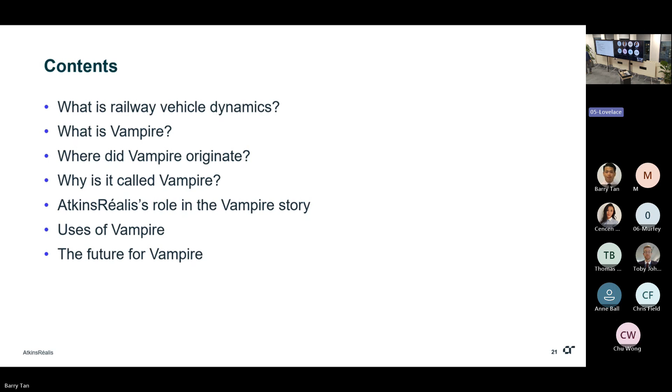So we'll start by asking, what is railway vehicle dynamics? What is Vampire? Where did Vampire originate? Why is it called Vampire? Right, our role in the Vampire story, AtkinsRéalis, what you can use Vampire for, and what's happening in the future. There are a few use case slides at the end. We'll see if everybody's still awake and if you want to pursue those when we get there. We can get the main bit done.

So, what is railway vehicle dynamics? So, dynamics in general is the study of masses in motion. Kinematics is the study of motion, but not including the mass - it's just where are things. When you start to include the mass and the inertias and the accelerations of particles or masses moving, that takes you into the realm of dynamics.

Vehicle dynamics is a particular subset that looks at vehicles - all kinds of vehicles, whether road, rail, space, any kind of vehicles. Railway vehicle dynamics focuses that down specifically onto railway vehicles. Many aspects are shared across all kinds of vehicle dynamics, but there are some special things about railway vehicle dynamics, the main one being the steel wheel to steel rail interface. Also, the fact that our vehicles don't pitch or yaw very quickly - they don't turn upside down. They generally have quite an ordered passage through the world, which makes some of the maths a little bit easier. But the wheel to rail interface is central to it.

So what we do covers modal, frequency and damping. If you remember things like this - a single degree of freedom system, we've got a mass at the top, a spring, a damper, and some input, which is hopefully the track's not quite that bad, but it's giving it some input, and that is being transmitted to the mass through the spring, and the damper is trying to control things and dissipate the energy. That's a very simple view of what we do in dynamics. That system will have a frequency, 1 over 2 pi root k over m, yes?

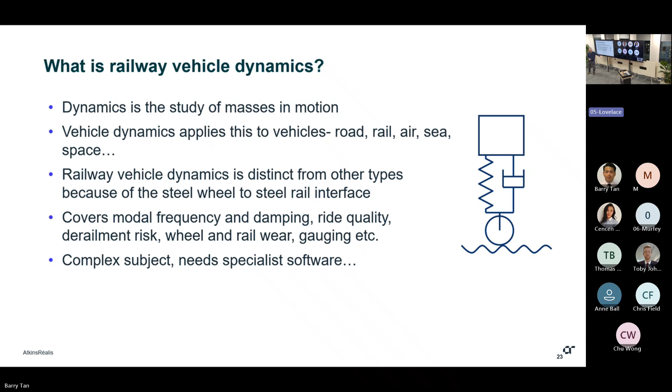As you can appreciate, it's complicated. A railway vehicle is a lot more complicated than that. So we need a computer and some software. And here it is.

So Vampire is what we call a multi-body simulation package. It models an engineering system as an assembly of masses connected by suspension elements. In the simplest analysis, they are linear springs and linear dampers. But we can have bump stops, friction, air springs, shear springs, all kinds of different things that you will find on a railway vehicle. We can model them, stick them in the model.

It's based on equations of motion. So the linear analysis with just springs and dampers that have a quoted rate, we can do old-fashioned eigenvalue analysis. We can basically solve lots of equations and characterize those vehicles in terms of frequency and damping.

But most vehicles are not like that. They include non-linearities like bump stops that do nothing and then they collide, or friction that does nothing and then it slides. That's what we call a non-linearity, and you can't really model that with an equation. You have to use a time-stepping algorithm.

So we do a simulation typically every millisecond or maybe less than a millisecond, and we see what's happened in the previous millisecond, then we see the forces that are applied to the masses. Then we know how the masses accelerate, so then we integrate twice to find where they've moved to, which then tells you how much all the things connected to them have moved, from which you can then calculate the forces, which then cause the accelerations, and you go round and round the loop very, very fast. So the equations are actually fairly simple, but they're applied very, very quickly.

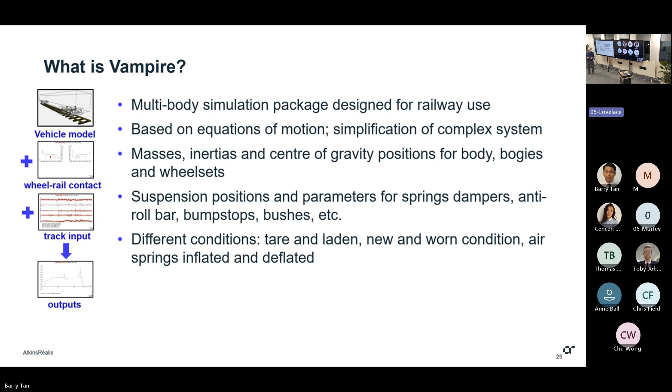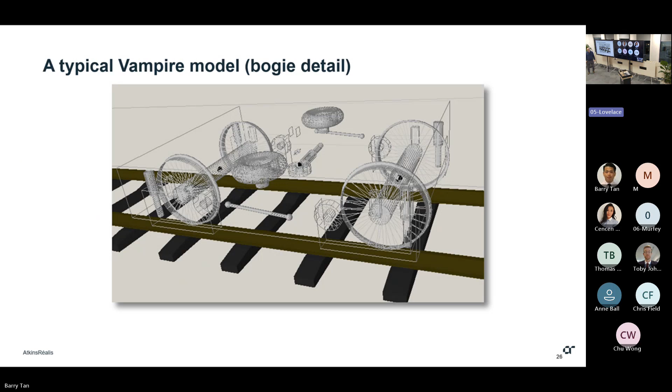This is a typical visualization of a bogie from a Vampire vehicle model. So we've got our wheel sets, we've got some air springs here, yaw dampers at the side to control the stability of the bogie. The axle boxes are held on by these radial arm bushes, and then we've got a lateral damper, some sort of traction arrangement in the middle, an anti-roll bar, primary dampers at the corners. They're the sorts of things that we include in the model.

So the sort of things that go into the model, if we've got the model, is measured track irregularity. So we want to know how the vehicle will respond to track inputs. We can get track data from things like the new measurement train, and we can use huge lengths of it if they're available. So sort of London to Newcastle or Edinburgh is fine. We can just make our way along that.

And that includes things like the curves, the cant in the curves, but it also includes all the irregularities, so the little lateral and vertical wobbles, changes in gauge as you run along the track. And we can also have a user-defined track input. So if we want to design a curve, just say, I want a 200-metre curve with 150 mil of cant, 45-metre transitions, for example, you can just make one as a text file.

Wheel and rail profiles - we can have design profiles like a P8 or a P12, or we can measure worn profiles using something like Mini-Prof or Calipri. We take those into Vampire, and the same things with rails. Then we combine the wheels and the rails together to generate what we call contact data.

We start with the wheels at one side and step them slowly across the rails to the other side, and we calculate the rolling radius, the positions of the contact patches, the size and ellipticity of the contact patches, to make a big lookup table. This is one of the things that makes Vampire run very, very fast, because once that table is available, you don't have to keep recalculating it - you can just keep going back to it.

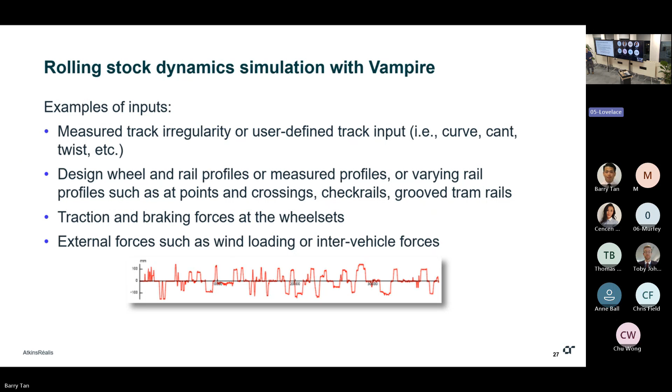So there's lots of things you can put into the mix that you get out - pretty much anything you want. Things we often get out are body accelerations, for ride quality. We can process them according to EN 12299 and predict ride quality index.

Displacement - so if we're doing gauging, we can look at how much the body moves and how near it's going to get to line side structures or trains passing on adjacent lines.

We can get suspension component forces and displacement. So if we want to know if we're overloading a damper or a bush, or we want to know what forces that element is putting into the vehicle structure, we can work that out.

Bogie accelerations and forces, wheel rail forces. So again, things like track shifting forces that are in the railway group standard 2141, we can predict those.

And safety against derailment - things like flange climbing, Y upon Q. This is an example of Y upon Q output. This is where the nasty dip in the high rail is, and that's where there's a high risk of the leading outer wheel actually climbing the side of the rail and over the top of the rail into derailment and rollover.

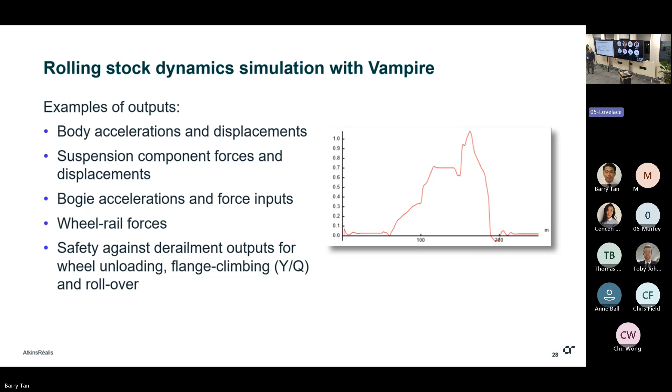But there's anything - wear numbers for wheels or rails. And if the output you want is not available, then you can invent it yourself, as I'll explain later.

So why would you use Vampire rather than just testing stuff? Certainly the freight industry was asking this question, particularly around things like cyclic top, which is actually extremely hard to test.

But you can systematically optimize things. You can try lots of different damper rates, different spring rates. You can see the effect of changing a mass or whatever it might be, and you can do it quite quickly. So you can cycle through things and get a big lookup table of results very quickly. You can test new and modified designs without the expense of having to build them and find that they weren't very good, which is always a win.

Very useful for demonstrating compliance with standards. And, from the RSSB, we need to mention this - suitably validated models that have been compared in simple tests with the behavior of a real vehicle can then be used to do simulations such as a Y upon Q simulation or a cyclic top, which can lead to acceptance of the vehicle through simulation rather than test.

Simulation is cheaper, more flexible and easier to control than track testing. Anybody who's tried to book a path, get a crew, you name it, for a track test - you don't have to do that. What you can do is decide a big range of possibilities, which 3 or 4 you might want to do on a track test. So you can use it as a first sift and then maybe optimize what you do on an actual track test. It allows inputs which are impractical or unsafe in real life.

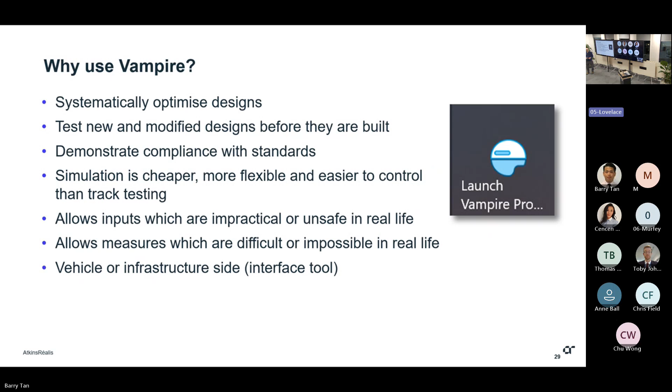We can get measures which are difficult or impossible in real life. So as you're rolling along the track, you can find out the size of the contact patches between the wheels and the rails and where they are, which would be exceedingly difficult to do in real life. We can use it from the infrastructure or the vehicle side, so we can look at loads going through the track. I know TfL are probably more interested in what happens to the track than what happens to the vehicles. And likewise, clearances to line side structures, that kind of thing.

Anyway, we can use Vampire to develop new components. There's things like inerters that are coming into prominence at the moment, and we're looking at the possibility of modelling those, seeing how they might be adapted for railway use. Hardware in the loop testing - I believe there's a rig up at Huddersfield University where you can sit in a mock-up of a railway carriage, and then drive it using hydraulic actuators with signals you can get from Vampire. So you just want to have a little look through the signal you're going to try first, to make sure there's no unfortunate spikes in it - you're going to break your leg if you play them through the system, but yeah, you can do that.

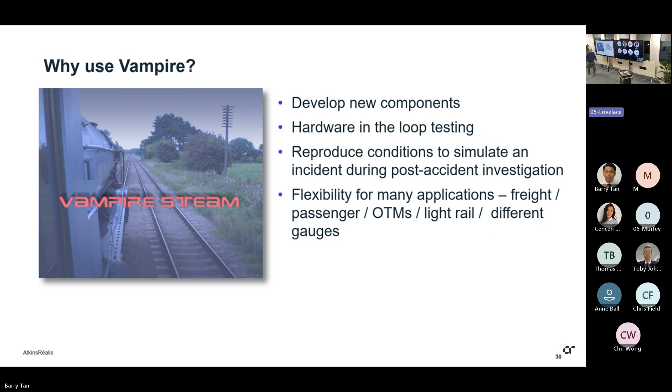This is something I've done several times working with the Rail Accident Investigation Branch. You can reproduce the conditions leading up to and after a derailment, try and find out what caused it. So you can do sensitivity studies and say, was it the weight? Was it the springs? Was it this? Was it that caused it? And then come to a reasoned conclusion based on the simulation. You can use it for all sorts of stuff - freight, passenger, on-track machines, light rail, different gauges, even steam engines. This has been done.

So that's what you can do with it, but where did it come from? Let's look into the murky past of Vampire. Railway vehicle dynamics actually goes back a long way to a gentleman called Stephenson, who you may have come across, who wrote in a paper in 1821 that he'd noticed this behaviour of a coned wheel set, that it would oscillate when run along a track freely. This is a fundamental principle of railway vehicle dynamics, and it leads to the hunting that I was experiencing this afternoon if you don't control it properly. People have been writing papers about this and investigating it for a very long time - there's a great body of literature about it.

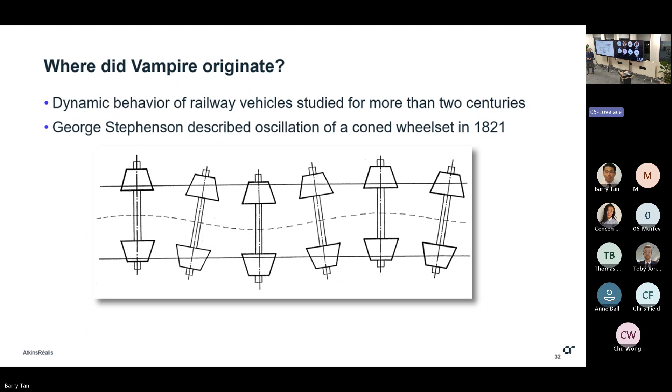But it was only probably in the 1960s that people started harnessing new computer technology to try and get more insight into it. When British Rail Research was formed in 1964 in Derby, this was one of their key objectives - to try and understand the dynamics of railway vehicles better through the use of computers. I think one thing exercising them quite a lot was that pretty much the entire British four-wheel wagon fleet was dynamically unstable at speeds above about 30 miles an hour. In the days of steam, they very rarely went above 30 miles an hour, so it didn't really matter. But when you put a big diesel on the front of them and whipped them up to 50 or 60, on several occasions very nasty things happened, and they wanted to understand more about that.

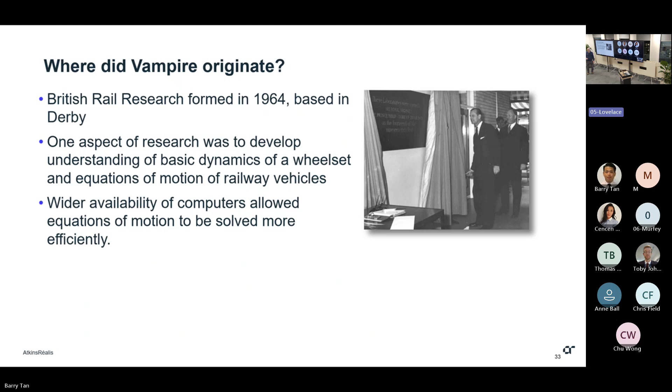So they started using computers to do it - initially, I believe, analog computers, which are really cool. They model the system using electronic analogues of mechanical components, and you can actually put a shock into the system and watch the oscillations happening between resistors and capacitors and whatever. Very, very nice and intuitive, and completely overtaken now by digital computers, which are better but kind of less elegant in a way.

As we've said, the early work was based on linear equations of motion. These are equations that you can solve, matrices that you can invert, and you can characterize your vehicle in terms of its frequencies and damping levels. And they got a long way with that.

They received a thing called the MacRobert Award in 1975. I've looked into this - it's still awarded, a very prestigious engineering award. MacRobert actually was a lady, I think she was the widow of somebody who left her quite a lot of money, and she decided to use it to encourage engineering innovation. She had a panel of worthies who each year would sift through various entries and award the coveted medal. In 1975, BR Research actually shared it with Westland Helicopters - a bit of trivia for you.

But they could only get so far. They were based on 2D simulations, so they had a vertical model and a lateral model, but not a model of everything together, rather than what we use now.

Using the linear theory, they looked into modelling a vehicle going around a curve, but they soon began to realise that the linear theory didn't really cut it, because things like the flange of the wheel come into contact with the rail, and suddenly the pattern of forces between the wheels and rails radically changes. You can generate very large gauge spreading forces, which linear theory wouldn't predict. Also the creep forces between the wheels and rails can build up, but they'll reach the point where the friction is not sufficient and the wheels will start to slide around the curve. That sort of thing just isn't covered by linear theory.

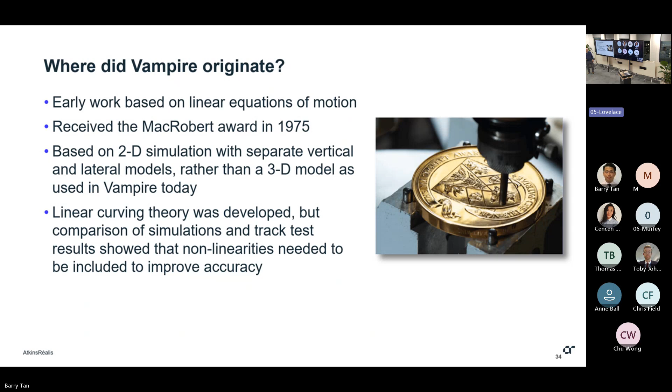So yes, the linear theory is to do with equations. The non-linear theory includes all these non-linearities, and you really need to solve it using a computer, because every millisecond or so as the vehicle runs along the track, you have to recalculate everything - have we contacted this bump stop, has the friction broken out, has the flange contacted the rail? And if so, all the equations change.

By 1977, non-linear curving theory had been developed. As we'll see in a moment, more testing was done. All the way through, they were building special vehicles and making measurements to test theory and practice, making sure that the software was doing what it should. From the non-linear curving program, a non-linear transient program was then developed, which is the one we use with the time stepping in it.

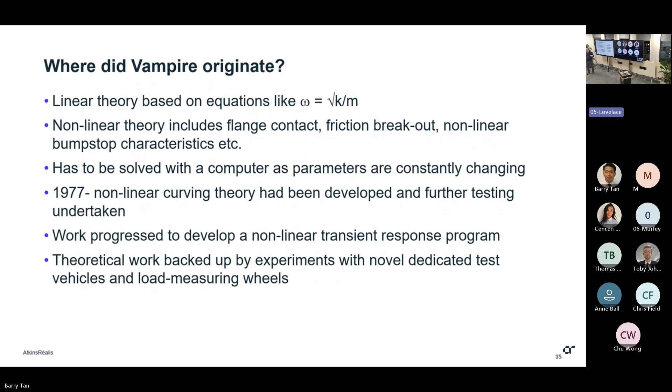It was used on the Blaenau Ffestiniog branch. If anybody's been up there, there are some literally screeching curves on that line, which was the ideal place to test the non-linear curving theory, because you were into flange contact straight away, and you could work out where that happened on what radius and then simulate it and see if you got the same answer.

And apparently in later years, it was used for tests with independently rotating wheels, which changed all the rules about dynamics, because the two wheels on an axle are normally assumed to be fixed together through the axle. But if they're not, and they can rotate at different speeds, then everything changes.

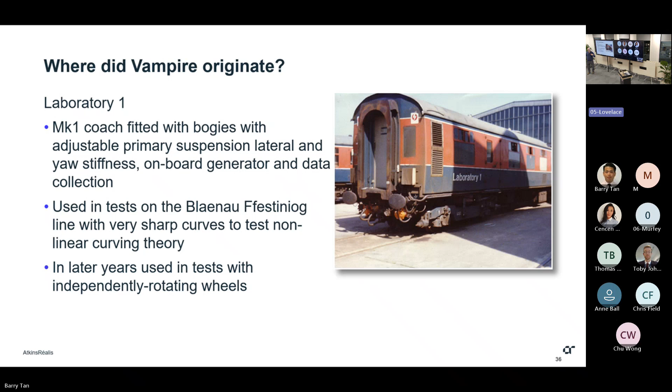This is another weird and wonderful vehicle - HSFV1, high-speed freight vehicle 1. It's got a linear suspension, so it's coil springs and dampers and kind of traction rods on the ends. But everything was deliciously adjustable, so you could play with it - you could put different springs, different dampers.

That was used, believe it or not, at speeds up to 100 miles an hour to validate the predictions from the Vampire simulations. We saw it sitting outside the tech centre about 20 years ago and thought, it's not very pretty, but it's so important to the history of railway vehicle dynamics - hope somebody preserves it. And thank goodness they have.

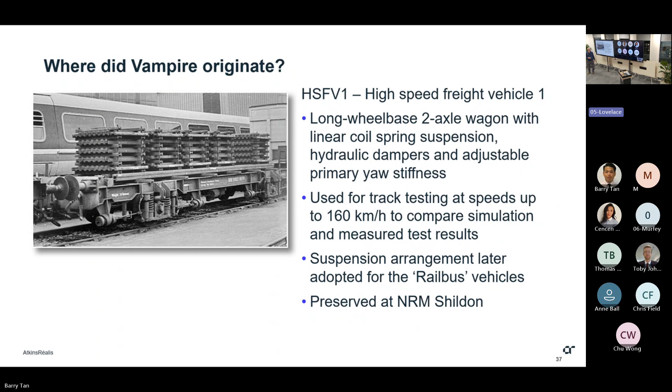So if you go up to the National Railway Museum locomotion at Shildon, you can see HSFV1 and you can go, ah, I know what that is.

Here's another weird one. This is called Decapod Lab 25. You can see it's basically a container wagon, a Freightliner kind of wagon, but it's got an extra wheel set in the middle. So it's got 10 wheels, hence Decapod.

In this photo, it also appears to be fitted with cross-braced bogies. I'm not sure that was always the case, but these are quite interesting. They allow the wheel sets to steer in curves independently of the frame of the bogie.

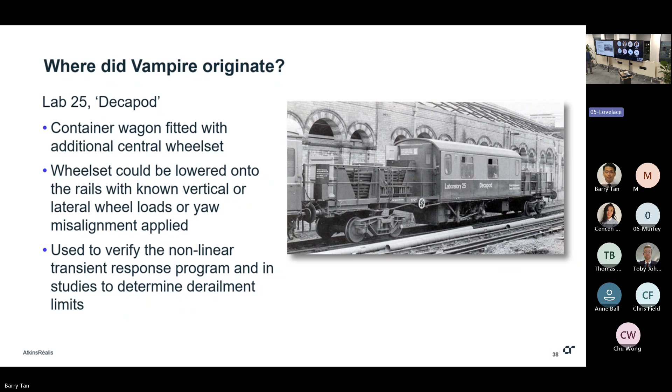But of course, the best one of them all was this thing. Probably half your parents don't even remember this, but this is the Advanced Passenger Train, the experimental one rather than the production one, which was quite a long time in the gestation, but it was an absolute phenomenal achievement when they got it running. I think this is it coming past the gas holders into St Pancras.

It was powered by gas turbines, and there is a very significant test run that was done with it in, I think, October 1975, when it got from St Pancras to Leicester in 58 minutes. And you'd be pushing it to do that today in a Meridian, but this thing was on, bear in mind, a timber sleepered, bullhead railed railway with semaphore signalling, which had not seen a fat lot of investment since the days of the Midland Railway in the 1920s. And this kind of spaceship thing arrived and showed what could be done on a conventional railway.

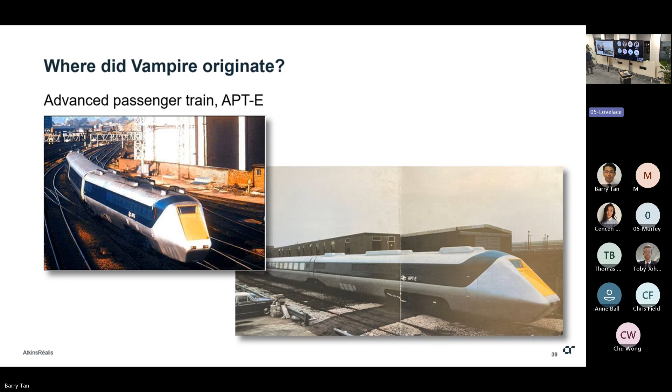And it was also very useful for the development of vehicle dynamics. So it had a lightweight aluminium body, articulated bogies, so the adjacent vehicle shared bogies, like the TGV does. It had a tilt system, so the idea was that it could go fast around any given curve, like the Pendolino subsequently does, by tilting. So although it was perhaps curving at 12 degrees cant deficiency, the passengers would only feel 6 degrees cant deficiency, so you could get there quicker.

Given that you were going like the clappers and that the signals were not going to be changed because that took money, you had to be able to stop very effectively. So they fitted it with hydrokinetic brakes. So the axles were just great big hollow things with turbines inside them. And when you needed to stop, you pumped oil into the axles, and the turbulence in the oil was then used to generate heat, which was then dissipated through radiators. And my goodness, it stopped, so long as the axles didn't break in half, which one did.

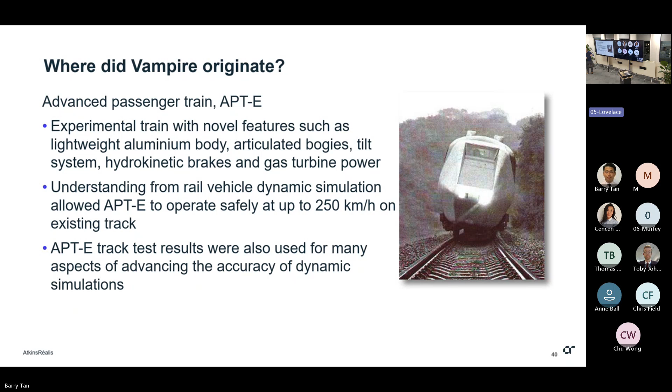But it was very useful for understanding dynamics. And understanding that allowed it to operate up to 250 kilometres per hour on the main lines as they were in the mid-1970s, which is a remarkable achievement. So there's also a wealth of test results that came from all the tests that were done on it, which were plugged back into developing what eventually became Vampire.

So by the 1980s, the various teams at BR Research had developed 4 largely separate programs. There was the linear eigenvalue program, which allows you to characterize the frequency of the bounce and the pitch and so on of the vehicle and how much damping is in each mode. The linear response program characterizes the vehicle by a transfer function, and then you can put a linear definition of track irregularity and or force into the transfer function and get a spectral output, so outputs in terms of frequency.

Then there's the nonlinear curving program, which allowed you to simulate what happens as the vehicle goes around the curve with the nonlinearities included, like the flange, friction breakout, bump stops, everything. And that then immediately led to the nonlinear transient program. So we had those 4 programs, but they were all kind of separate. They didn't all use the same vehicle model, and they weren't all accessible from the same front end. So what they decided to do was to bring them all together and change them so that they all use the same model, a full 3D model, lateral and vertical combined, and call it Vampire. And that's what they did.

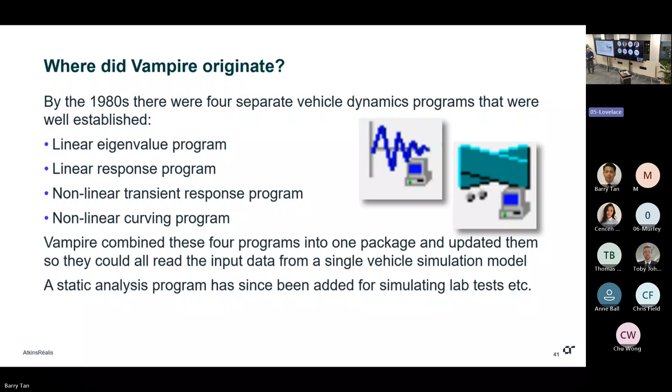What has also been added, strangely, is a static program. It sounds a bit odd having a static program in a dynamics package, but it's actually very useful because we can use it for modeling things like laboratory tests - delta Q upon Q tests or sway tests. Because the vehicle isn't moving, the modeling of the wheel-rail interface can be much simplified, so they run very, very quickly. It's quite a useful addition.

You would formulate the questions you wanted to ask the programs in the form of punch cards. You'd generate a deck of punch cards and tie it all together, because if one of them was upside down, it would ruin everything - they all had to be in the right way round and in the right order. You'd take them to somebody who would put them through a machine, and that would be sent to Birmingham or somewhere, and they'd run your eigenvalue analysis overnight. Then you'd get the answer the next morning and it would say there's 4% damping in the bounce, and you'd go, right, wanted 5. Another set of punch cards.

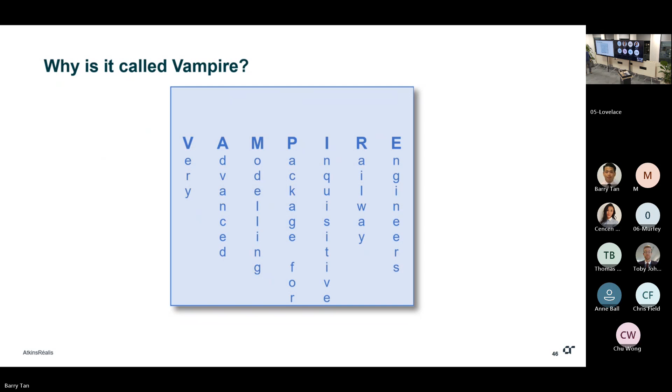They might or might not like it, but they would remember it. Yeah, so what it's supposedly is - which is terrible, isn't it? Don't shoot the messenger, but that is officially it. The logo in the corner of the plots was the front end of an HST, and somebody said, well, that looks a bit limp. I know - he took the lid off his kettle, put it down on the logo and drew around the lid, and there you go, it's in a circle now, it looks better. That's how it looked for a long time until we upgraded it to look a bit more like a Space Invader. We prefer this. You pays your money and you takes your choice, really.

So, has it been validated? Is this all just nice made-up numbers with no connection with reality? Well, all through the generation of the Vampire predecessor programs, they were rigorously validated against test results, and BR Research had the muscle to do that. I don't think there's any organisation that could do it now in this country - build a 10-wheel test vehicle and fit it up with control systems and all that sort of stuff. It's a huge undertaking, but that gives us confidence that it's built on a firm foundation.

This isn't exactly validation, it's benchmarking. In 1997-8, Manchester Metropolitan University - the forerunner of the Institute of Railway Research at Huddersfield - undertook a benchmarking exercise of 5 big railway dynamics packages: Vampire, NUCARS, Adams, Gensys and Simpack. I think since then Adams and Gensys have kind of fallen by the wayside. NUCARS is still around - that's an American package, suspiciously like Vampire in its innards because it was written by two guys from BR Research who pocketed the code and emigrated, but we'll say no more about that.

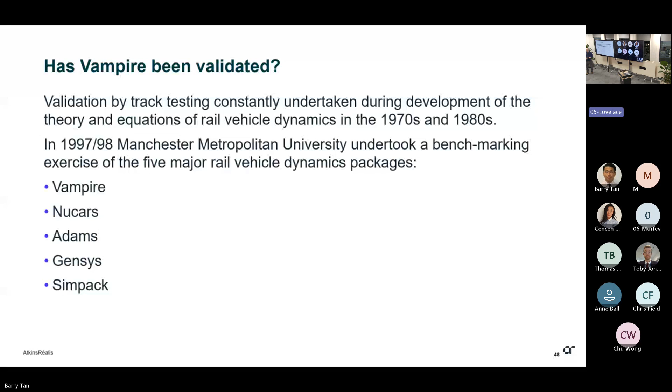Simpack is probably our main rival, and that is a full dynamics package, not just railway dynamics. So it will do all kinds of things that you wouldn't try to do in Vampire. But that makes it a little bit hard to use and terrifically slow by comparison.

The upshot of all this was published in a very worthy special edition of the Journal of Vehicle System Dynamics, originally published in 1998. Everybody submitted their results and compared them, and most of them went, 'Ooh, crikey, we better do that again.' But the Vampire team said, 'No, it's fine, we'll stand by what we said.' And the results turned out very positively.

There was good agreement between Vampire, Nucars and Gensys, which is significant because those three were the railway-specific packages rather than the general ones. Probably not a huge difference between Vampire and Nucars. I think the Gensys results were good, but Gensys was very, very slow by comparison with the other two. At the time, Nucars hadn't done a lot of development to make it more user-friendly. I think it's very capable, but you have to be a bit of an enthusiast to make a model in Nucars.

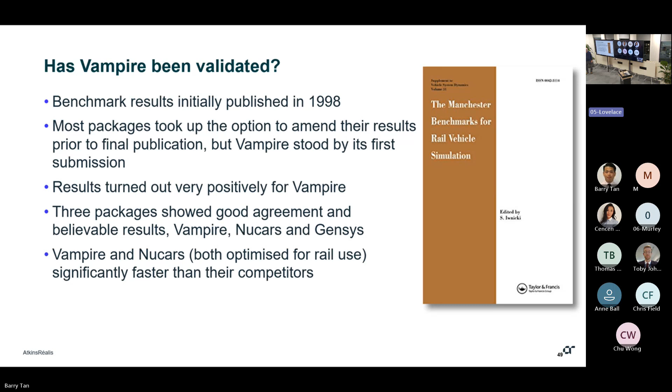As part of rail privatisation, BR Research was bought by AEA Technology, the technology arm of the Atomic Energy Authority. In 2006, AEA Technology spun off its railway activities as a separate business called DeltaRail, which simply renamed itself Resonate in 2016. So it was the same organisation, and there was a fair bit of continuity there.

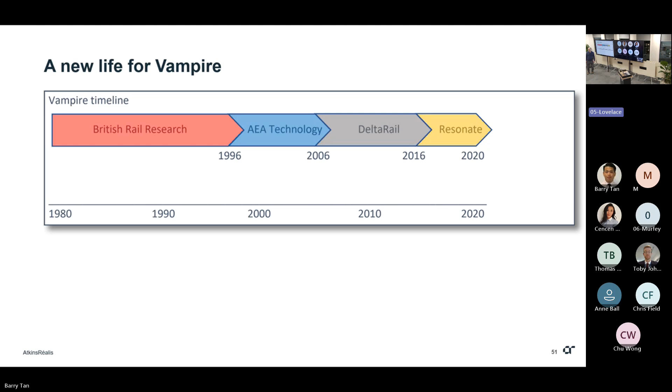But in 2020, our team had dwindled to 4 members, 2 of whom announced they intended to retire. And as Resonate was really far more interested in signalling and traffic control systems, they gleefully said, 'Right, we'll get rid of Vampire then.' But there were many voices out there that said, 'We'd really rather you didn't.'

Somewhat belatedly, they made a third option available, which is what we call an exploitation license, which would allow a third party to license Vampire to get access to the source code, to update it, support it, and license it to third parties, which is what we needed to allow Vampire to continue. So at that point, SNC Lavalin Atkins acquired one of these exploitation licenses. They don't actually own Vampire, it's still owned strictly by Resonate, but that is at the level it was when we switched here. But of course, we've now developed it further since then.

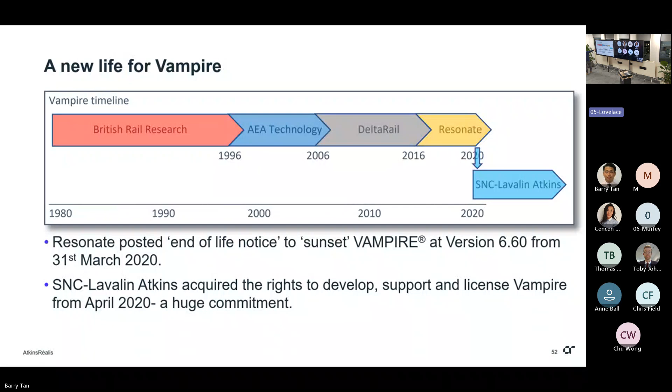And it was at this point that I also moved across with Vampire, having followed it from the AEA Technology days, because I thought, well, I don't want to do signalling, I'll do Vampire. Can I be made redundant, please? Thank you. So then I went across the road and picked up where I left off.

So the first thing that SNC Lavalin did was to rebrand the last version that Resonate had done. Version 7 was not technically different in any way from 6.6, but it was rebranded to put the SNC Lavalin brand on it and to remove references to Vampire as a registered trademark because they wouldn't let us have that. And then we did an enhancement release in May 21, version 7.10, and then a bigger release in version 8 in 2022, which added an inline creep law.

So instead of doing this pre-calculation of the contact data, if you want, you can calculate it at every time step through the simulation, which allows you to do weird things like rails that roll outwards under the effect of the lateral forces. We are now looking at adding in things like wheel flats actually on the wheels, whereas before we've had to model them by making the rail head profile a weird shape, but we can now start looking at having flat wheels, and interesting stuff like that, but it does run a lot slower than the standard version.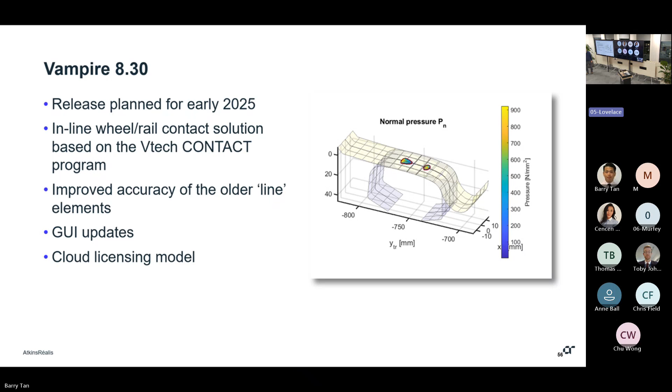If it's cloud licensing, you can just go on and see if your license is free to use and off you go. And it does open up all sorts of options for giving people short licenses or licenses with certain restrictions on them, that kind of thing. So that should be out soon.

And what might follow in future? Data plotting improvements. For those of you who are familiar with Vampire, it has the idiosyncrasy that when you plot results on a graph, you can only have 5 lines on the graph. Who we need to blame for this is lost in the mists of time, but we'd really rather like 8, wouldn't you? You've got 8 wheels, 8 plots. I think putting the plots on the graph is easy, but then you have a legend with 8 things on it, which you have to fit somewhere.

So such is the interest in that, I think they're going to have a look and see if that can be done. Contact patch plotting. So we know where the contact patches between the wheels and the rails are, and we know how they move and what shape they are. And we have an animator, so we can create an animation of a vehicle running along the track. Combining those things, it should be possible to run along looking down through a wheel set at the contact patch and watch it moving across the rail as you go along, watching its shape change. So that should be possible.

Include rail roll in the track model. So we need that in the inline contact calculation. When you apply lateral forces to the rails, they themselves might actually roll outwards, which means the head of the rail turns, which affects its interaction with the wheel. So that's something that we could add.

What else have we got? More elements to improve modeling couplers and buffers. So we have some stuff for couplers. Buffers are very, very difficult to do because they sort of slide about and they can actually, in theory, get hooked behind each other, which would be a very complicated thing to try and model. But that's a little challenge for the future. Always got to have something to be doing.

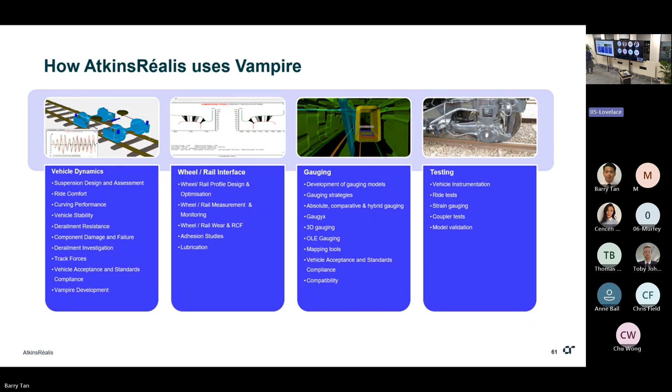Our team also does testing, and we sometimes do things like the peak counting analysis from the group standard. You can do that on test results as well as simulation results. I only did this yesterday - somebody gave me a set of results to put through the Vampire peak counting.

This is looking at derailment risk, so we can calculate Y upon Q against Nadal's limit, so you can work out the limit and then work out whether your wheel set is at risk of climbing over the rail.

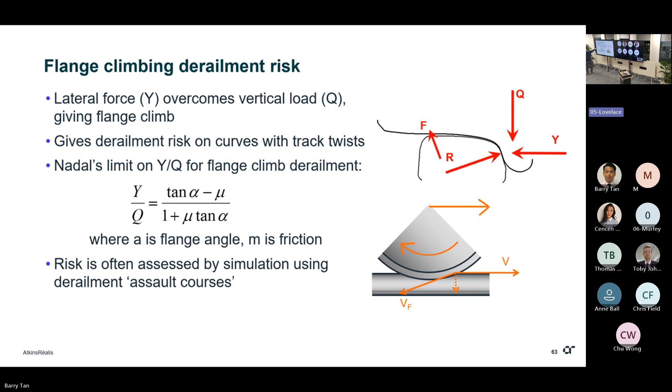Yeah, so this is a simulation. We have got a little video. Very dark, isn't it? But that wheel is now heading for the head of the rail.

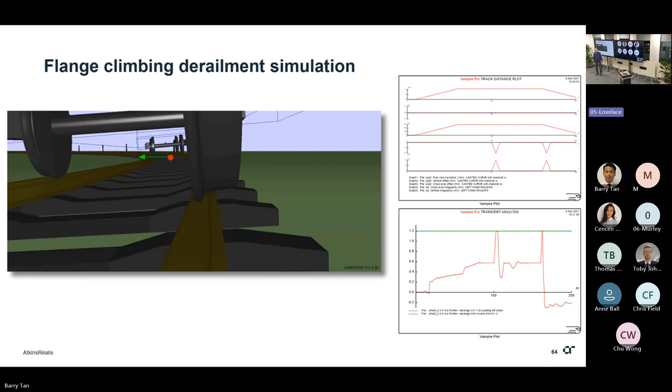Eventually it might drop onto the outside. These are the standard test tracks that we use, which are defined - they've now been moved to EN 14363, they used to be in GMRT 2141. You have a canted curve and some nasty dips in the high rail to try and persuade the leading outer wheel of the vehicle to climb over the rail. This is the sort of output that we get compared with the limit.

Oh yeah, nasty, nasty - cyclic top. Some of you may recall a derailment at Gloucester in 2013, when a rear vehicle of a container train jumped off the rails in a situation like this. I was very involved in simulating that in Vampire, and it led to the inclusion of the cyclic top test simulation in the railway group standard.

On the same day, another container train derailed - was it on the North London line, Camden Road, I think - and that was due to a combination of bad track twist and badly loaded containers with an offset load, and that led to another change in the group standard. So it all kicked off on the 15th of October 2013, I think.

So what happens here is if you've got repeated vertical faults, then you can start to excite a response in the vehicle, and if there's not enough damping in it, the vehicle can literally jump off the track. That's what happened at Gloucester.

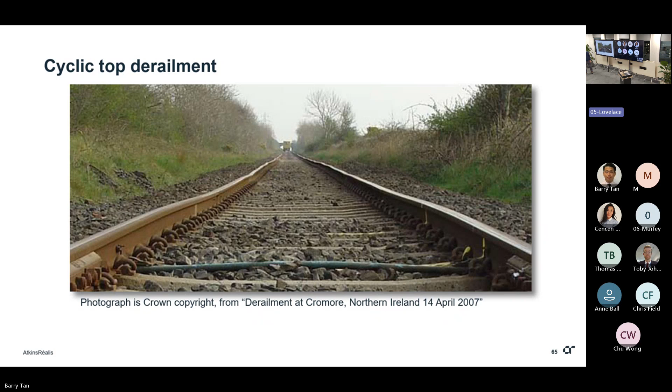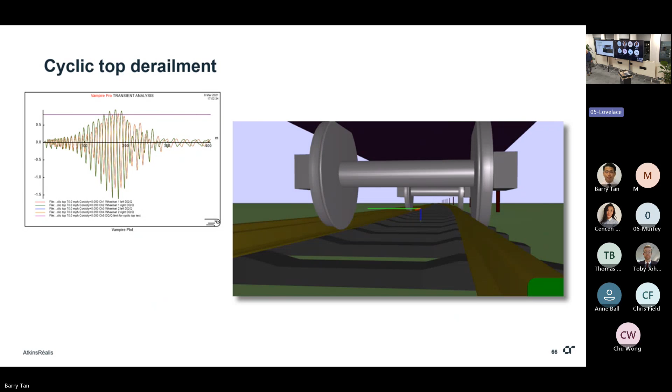We have another video, so some marvellous cyclic top there. Bit of luck, this one will actually jump off. Yeah, see, it's getting a bit airborne now. Off she goes, there we go. So much better to do that in Vampire than in the real world.

There's a trade-off between curving and dynamic stability. If you want to stop the wheel sets wandering across the track, you hold them very tightly to a bogie, with something like a very stiff radial arm bush. The problem is that when you try to run the vehicle round a curve, the wheel sets can't align themselves to the curve. They start attacking the high rail and causing a lot of wear. So we have to try to optimize the suspension.

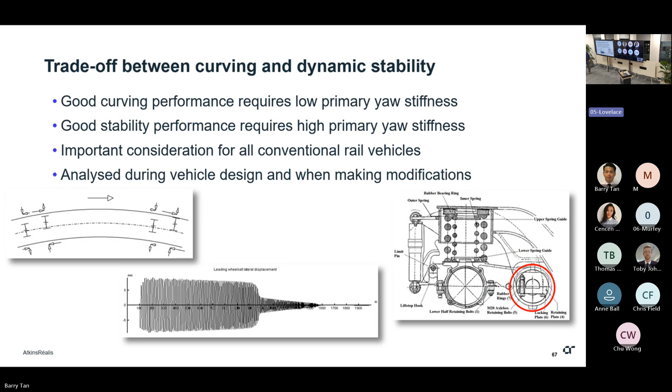Or we can use a clever thing like this, which is called a HALL bush. This has been fitted to quite a few passenger fleets in this country. What it does is include an element of damping. So the system looks like this.

You have a very low stiffness and then a much higher stiffness in series with the damper. The idea is that when you're going around curves and things are happening very slowly, the damping element just moves freely because the velocity is very low. So that side of the circuit is inactive and all you get is the low stiffness. Then as things start to kick off, if the bogie tries to go unstable, the velocities get much higher, the damper damps, and then eventually it almost locks up.

And then it brings this second spring into play, which significantly increases the stiffness of the bush. So you can see here, at low frequency, that's the stiffness, and then as the frequency goes up, way up goes the stiffness. So you get a bush which is the best of both worlds - it allows freedom for curving at low frequency and good fixity to maintain stability at high speed.

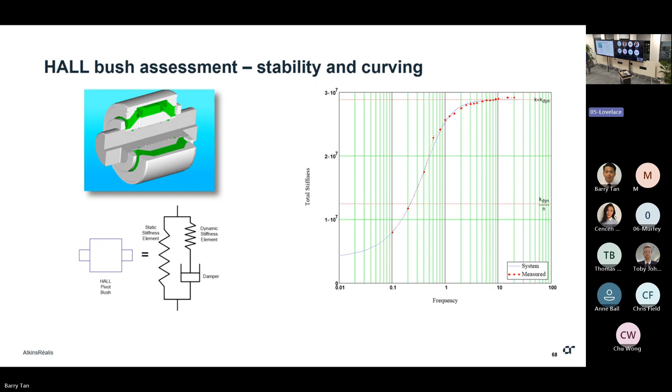And we can predict that quite easily in Vampire.

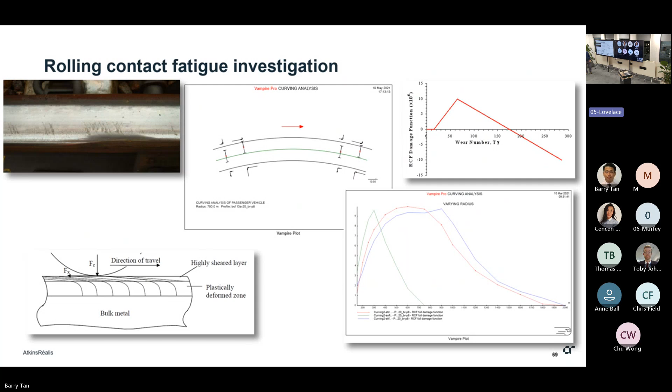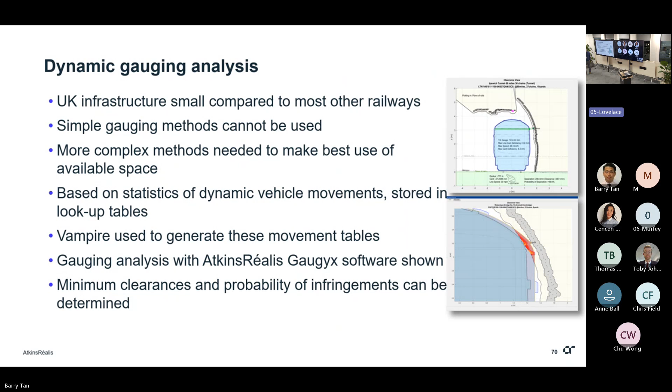Dynamic gauging - this is something we do a lot of. I won't go into it in huge detail, but basically we generate lookup tables of how a vehicle moves at different speeds, different track qualities, and with different amounts of cant. Then you can put that lookup table into a program like Gaugyx and run it along a particular route through all the measured structures, to work out whether the vehicle is likely to get close to them or hit them or whatever. Generating those tables takes quite a while, so Vampire is quite well suited to it.

Somebody was able to find me a track data file for the line from, I think it was Tan-y-Bwlch, to Harbour Station at Porthmadog, and we ran the thing down there. We also put in a little user subroutine, so if the speed got too much, a few of the wagons at the front put the brakes on until the speed got down to something reasonable, and then they take the brakes off again. Then you would see how far across the cob it would run.

That was an amusing demonstration of something we're trying to develop now for looking at long train dynamics - forces in a long train, and potentially doing stuff like sectional timing. So I'm currently developing a simulation running a container train over Shap, from Lancaster to Carlisle, just to see how long it takes to get there. So all sorts of possibilities.

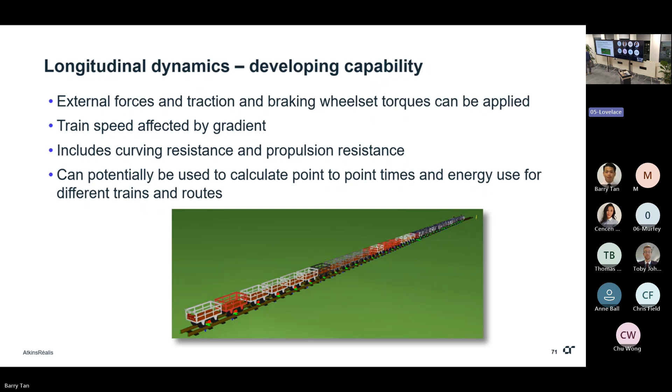And this is the video I knew we had. Normally our models are just one train - here, I think these may be connected by a very soft element, but they're behaving fairly independently.

So Phil did this - bosh, there it goes, gives it a good nudge. And then it's coming back for some more because the second one's going to slow down again. A little while to run. Here we go, gives you another one. There we go.

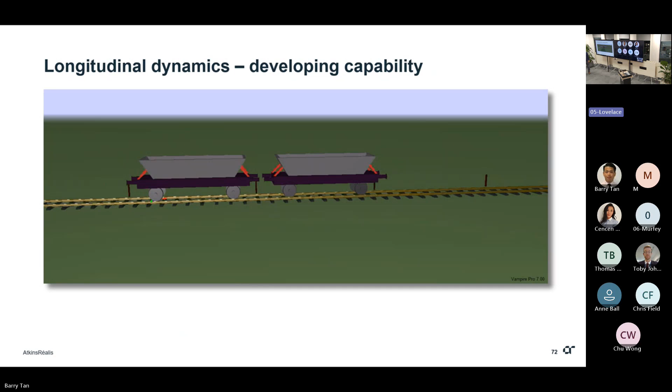In this case, you can model something like buffers because you know they're hitting each other directly, as the track is straight - that's a nice, easy one. It's when you get buffers on curves that life gets very interesting. So there we go - oh yeah, and close to my heart.

So when the new steam loco Tornado was built in 2008, they largely accepted it on grandfather rights because it was the 50th of a class of 49 that had been fine. Network Rail had a few questions that we needed to answer by doing some testing on the Great Central. And we thought, how do we decide whether the results are acceptable or not? So I came up with the great idea of, let's test another engine, so we get another grand day out. So we tested Oliver Cromwell, which had just been accepted back onto the main line. We showed that Tornado was better than Oliver Cromwell, so tick the box.

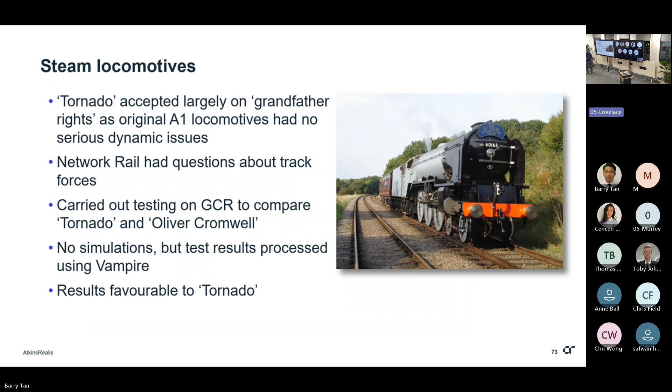But along the line, we ended up making a Vampire model of Tornado and validated it against the recorded test run between Newcastle and York, November 2008, which I was privileged to be on. And then we've used that model to create a model of Prince of Wales, which is the new 2-8-2 that they're building in Darlington. So that's the Tornado model. That's the Cartazzi truck at the back, which is a fiendishly complicated thing I'll tell you about in the pub later.

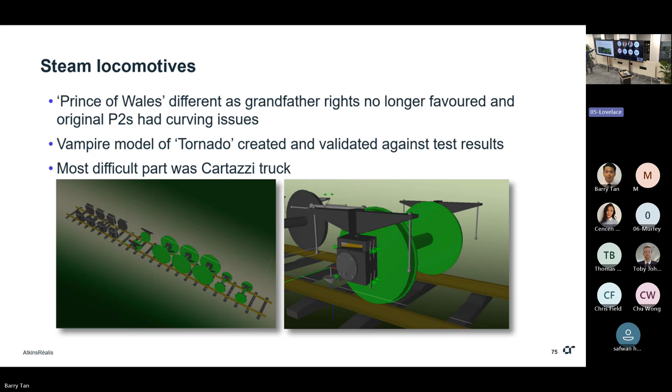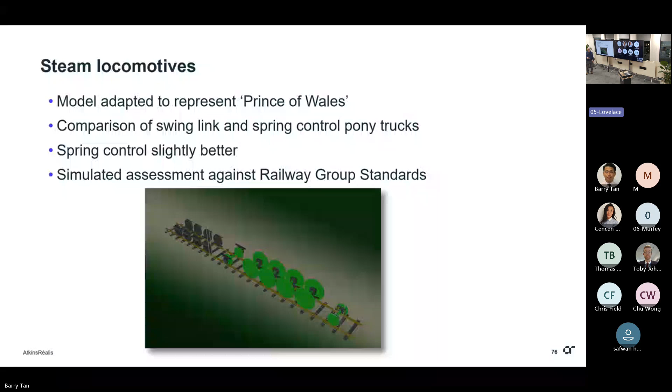So that's a quick flight over what happens with Vampire, where it came from. I hope you found it amusing, and very happy to take the odd question.